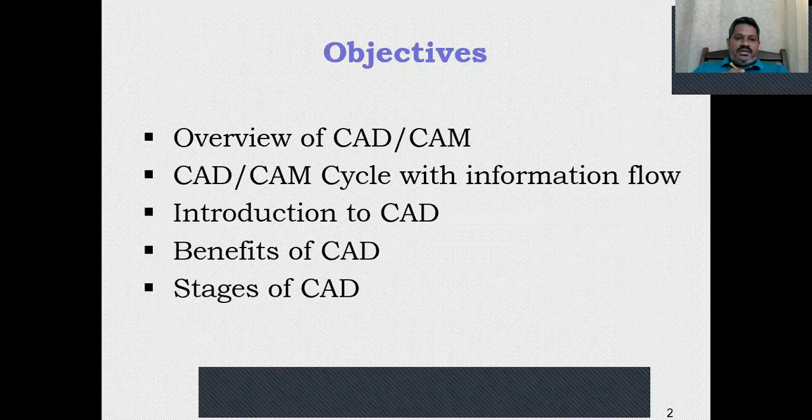Then we will see what exactly the CAD introduction. We will see what is the meaning of CAD. We also try to define what exactly the CAD is. Then we will see the benefits of CAD after defining, different benefits by using CAD. Then what exactly the steps required to implement CAD. So these are actually the objective of this slideshow.

So when it comes to the overview of CAD CAM, the objective of any of the manufacturing industry, any of the firm, is to produce the products with the lowest possible cost. You take any industry or any firm, their ultimate aim is to reduce the cost of the product. That is the ultimate aim.

The current trend of the manufacturing is, I mean, day by day, the technology is improving. So with respect to the technology, the cost of the product is also reduced automatically. If you don't adapt the technology in the current trend of manufacturing, we cannot stay in the global market. So that is the crucial point we need to identify, we need to recognize

whenever we want to stay in the market, in the global market, because the whole globe is in the globalization policies, you should be able to produce the products with the lowest possible cost. Then only we can stay in the market. So we need to adapt the technology as early as possible to produce with the least possible price.

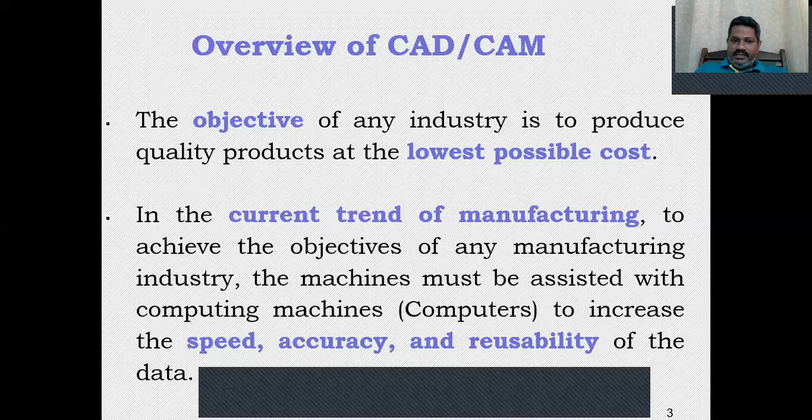Those machines really help us to increase the speed, accuracy, and the reusability of the data. Without this, we need to put more effort to increase the accuracy, to increase the speed. So as the technology is improving, we need to adapt that technology. Otherwise we cannot stay in the market. So this is why exactly we need to adapt the technology.

Then design and manufacturing terms. Our subject is computer aided design and computer aided manufacturing. So what exactly is the design and what exactly the manufacturing? We will try to define, we'll try to see the steps later in the coming slides.

So the design and manufacturing terms basically are, because the usage of the computers increased in the design side and the manufacturing side, the design and manufacturing evolved as computer-aided design and computer-aided manufacturing.

In other words, we can say that the use of the computers in design as well as manufacturing increased, so that the design term evolved as computer-aided design, in short form CAD, and the manufacturing is termed as computer-aided manufacturing. So the aid of the computers increased in design and manufacturing, so these terms evolved as computer-aided design and computer-aided manufacturing.

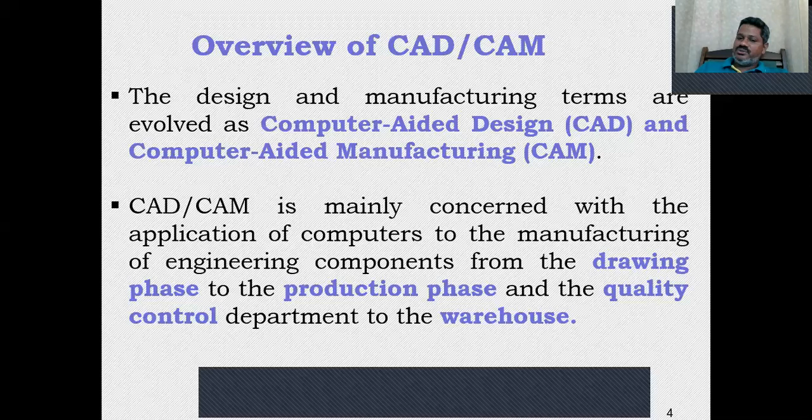When you come to the typical CAD-CAM cycle, if you open any CAD-CAM textbook, or read any content related to design or manufacturing, there must be some information flow between CAD and CAM. We will try to see what exactly the information flowing from the starting phase to the production stage is in a typical CAD-CAM cycle, from the conceptual design to the CNC machining.

This cycle starts with the conceptual design. Conceptual design means you are going to identify a problem in this stage. Based on this problem, based on this concept, you will gather some information. That information is termed as conceptual design information. For example, you want to design one shaft. The objective of that shaft is to transmit 5 kilowatts power from the driver shaft to the driven shaft.

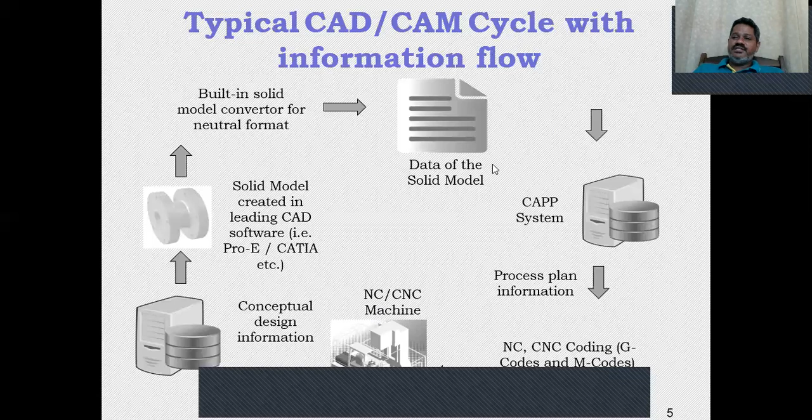Then that process planning information will be used to program, which is normally G code and M code, also termed as CNC programming. That CNC program is again fed into the CNC machine to machine the object. This is exactly the typical CAD/CAM cycle and its information flow in any CAD/CAM implementing industry.

When we move forward to the introduction to CAD, in the previous slide we have seen the information of the CAD/CAM flow, how information is flowing in the typical CAD/CAM cycle. Computer aided design is basically a technology. Using that technology, everything will be documented. The products are designed and analyzed using a computer.

Most people will assume that CAD means computer aided drafting, but it is not drafting. It involves the analysis also along with the drafting. Most people think CAD means computer aided drafting, AutoCAD like that, but it is not like that. It also involves the analysis process. This is the major step in the design process. Computer aided design is a technology that designs a product and documents the design process.

This computer aided design, CAD, is going to use and assist the computers for the architects and also for the other design professionals in all of their activities. As I said just now, design also includes the analysis part. The computers are really helpful in analyzing the parts.

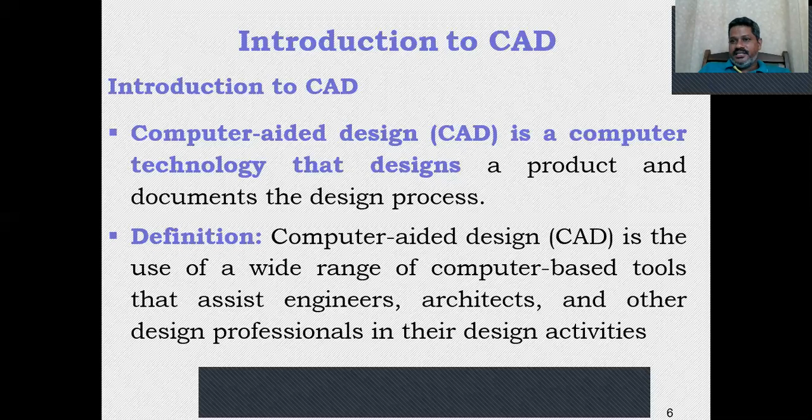Simulation means if you exceed the load on the shaft, if you exceed the power transmitted, the shaft is going to fail. You can even see the animation of where exactly the shaft is going to fail. In that manner, computers are extremely useful on the design side. Really, the computers assist the designers to increase the speed and accuracy and also the reusability of the existing data. Then let me move forward.

We will see the reasons. What are the reasons for implementing CAD? The first is to increase the productivity of the designer. Productivity of the designer means, assume that a designer took 1 month time to design a coupling. Of course, he may not take that much time.

If a designer takes 1 week to design one coupling, if the designer uses the CAD software, he can design 2 to 3 components in 1 week. In that way, the productivity of the designer definitely increases. Also, the quality of the design increases. If you see, designing includes a number of calculations.

If the calculations are performed manually, it may lead to errors. If all the calculations are performed using a computer, it will definitely lead to fewer errors. In that way, we can increase the quality of the design. Remember that it is the quality of the design, not the quality of the product. We are in the design stage.

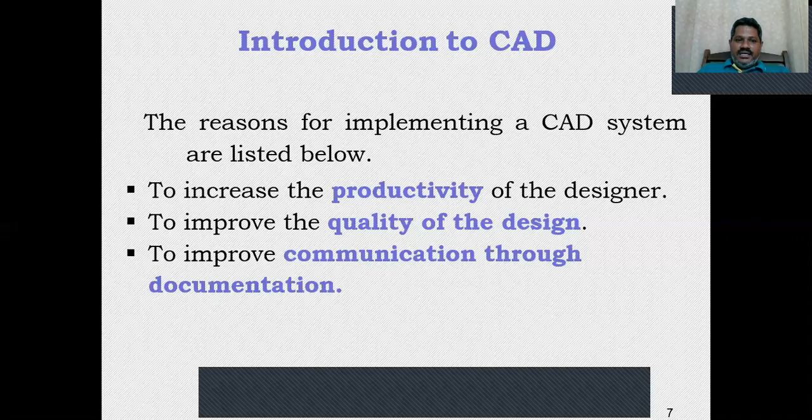When you come to the benefits of CAD, it decreases the error percentage. Definitely, we are using a computer. You have a program. Once the program is in your hand, when you run that program any number of times, the error will definitely be less. When you perform the calculations manually, that may be prone to errors.

When you implement CAD, it also decreases the effort. If you want to design a complicated component, a number of calculations should be performed in a number of iterations. This is really a typical task, to perform the iterations. If those calculations are performed using or assisted by a computer, the effort definitely reduces.

It saves time, definitely. It is a computer, so it saves time. Within a short span of time, it gives us the result so that we can save time. It is also easy to edit. To design a new component, suppose you want to modify the existing one, editing is very easy.

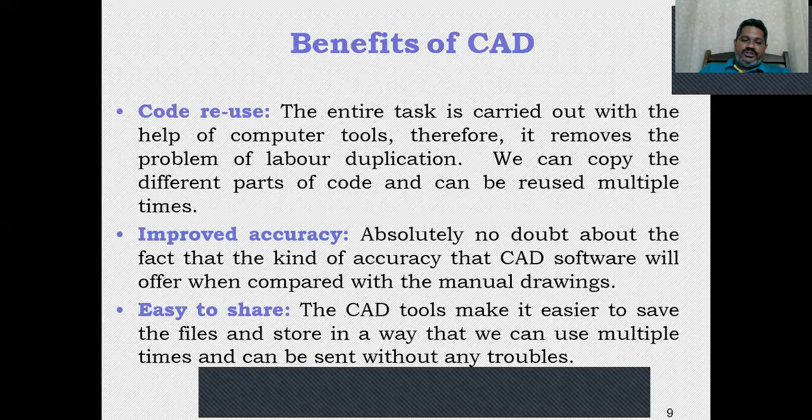We need to remember: easy to share, accuracy increases, reusability is more, easy to edit, it saves time, decreases the effort, decreases the error percentage. Those are all the advantages when we use CAD.

When it comes to the stages of CAD, basically we have 6 stages in CAD. The first stage is identifying the problem and recognizing the need. I combine them together. As in the example I took just now, my requirement is to connect the driver shaft and driven shaft to transmit power from one location to another location. That is my need.

The problem is how much diameter of shaft is needed to transmit the power from one location to another location. The need is transmitting power from one location to another location. The problem, how much diameter of shaft is required to transmit power from one location to another, is identifying the problem.

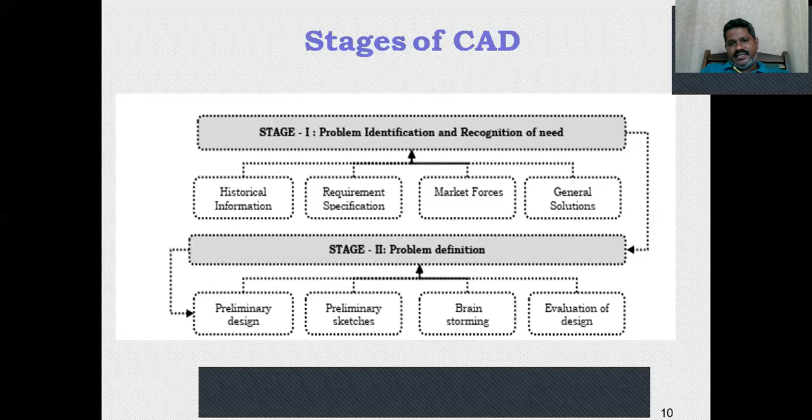Then if it is a complicated component, we must need to produce that. In that case, a brainstorming session should be performed with the experts. They will discuss what is the feasibility of the component to manufacture. So during these sessions, the experts will decide the manufacturing strategy. So this stage also requires this information. Finally, in this stage, we need to evaluate the design. We need to move further for the design process. The first step and second step are very, very important in the CAD stages.

Then the third stage is geometric modeling. Geometric modeling, in the first slide, as I said just now, in the typical CAD CAM cycle, we have solid modeling. We create solid models using solid modeling softwares, which are commercially available in the market, like Solid Edge, SolidWorks, Unigraphics. We can create a model using those softwares. After creating, we should be able to visualize the component.

During this stage, we are going to model, we are going to visualize the component, how that looks after manufacturing. Of course, it may not be optimized. It is a rough stage. Okay. After modeling, you can visualize the component in any of the solid modeling software. Then we will go for the analysis. As I said just now, we have a number of analysis softwares available in the market, like ANSYS and Abaqus. Using those softwares, we will analyze the component, we will analyze the solid model.

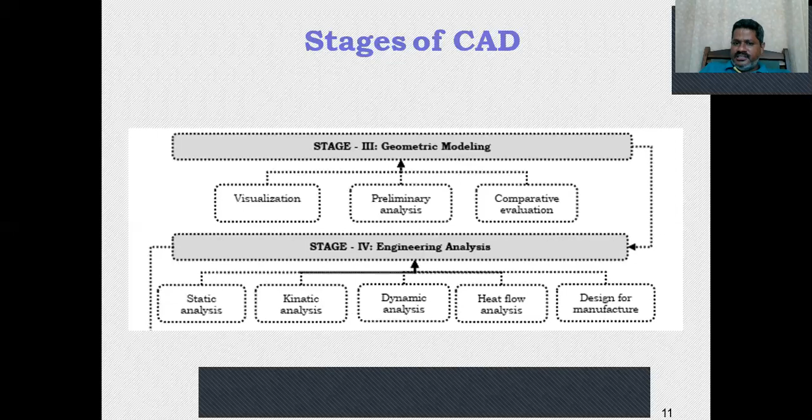Then design for manufacture and assembly, DFMA. When you assemble a component, how it looks, whether the relative motion between the links is feasible or not, all these analyses will be performed during this stage. Static analysis, kinematic analysis, kinetic analysis, dynamic analysis, heat flow analysis, DFMA. All these are very important steps in almost all the CAD stages. This is a very important stage.

Then the fifth stage is prototype development. We have analyzed the problem, created a geometric model, and performed critical analysis, static analysis, dynamic analysis, heat flow analysis, DFMA. After analysis of the component, we need to create a prototype of it. A prototype means a small model, a replica of the original model. The size of that model is less than the original one. That replica is created for testing purposes.

We will apply different loads on it. Based on that load, we will analyze whether the design is feasible or not. A small prototype is developed, and that prototype is tested and evaluated. So after preparing the prototype, after analysis, we need to define the requirement. This stage can also be termed feasibility, or design refinement.

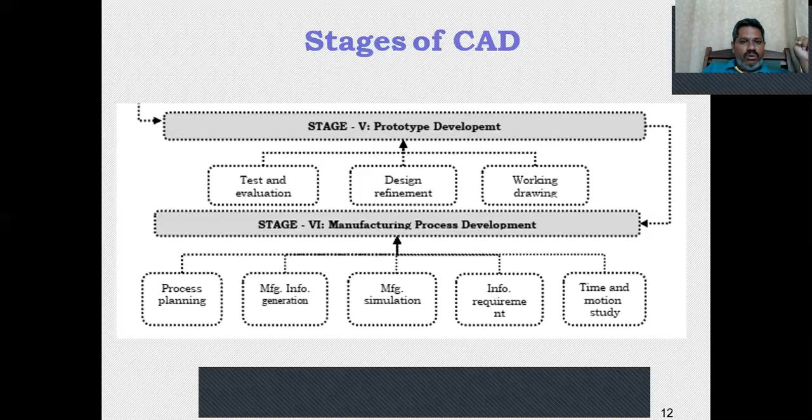This stage is also very important in the CAD stages. This is the sixth stage. This is a very typical as well as important stage among all six stages.